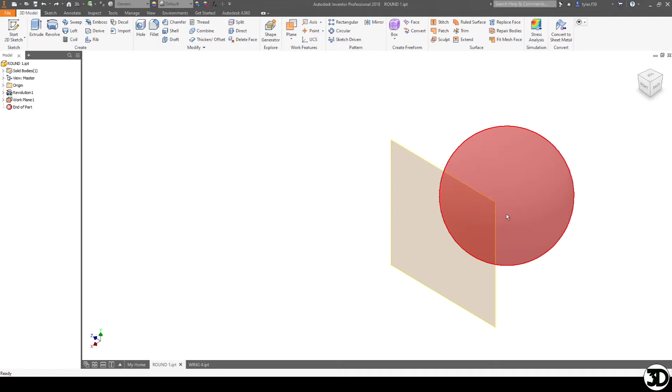In this video, we're going to talk about a couple different ways to add details to curved surfaces. These are going to be more on the beginner side just to help you out, and hopefully it'll assist you in your future designs. So let's get started with the first way to tackle this.

I'm just going to make a simple circle off of this work plane. We're going to make it 1.5 inches in diameter, and then we're going to make a square that's 1/2 by 1/2.

Now that we have our details, we can go to the Emboss, click the feature we want, and we can add it as an emboss or an engrave. So let's do an emboss first. You can see that it adds the detail no problem, and it matches that curved surface quite nicely.

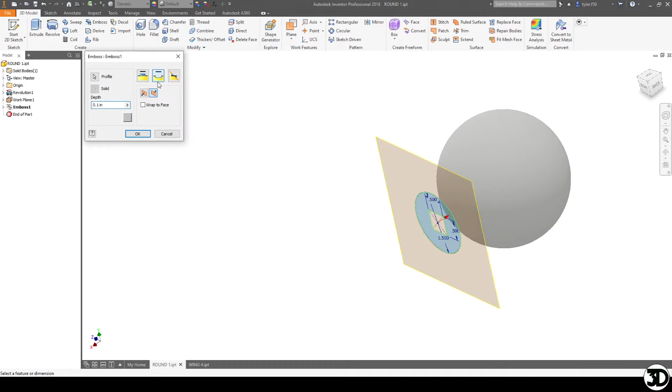However, we can also go and edit this and make it cut into the material as well to do the same idea. So you can do any kind of shapes you want and cut into this. So this is one style that you can utilize.

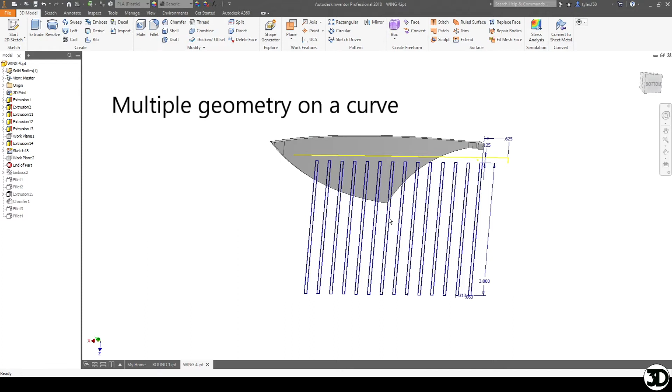Another version that you can do is, this is just a wing that I'm making for a part that I'm doing, and it has multiple cuts that are in it. So we're going to use the emboss feature the same way, and we're going to do a cut in.

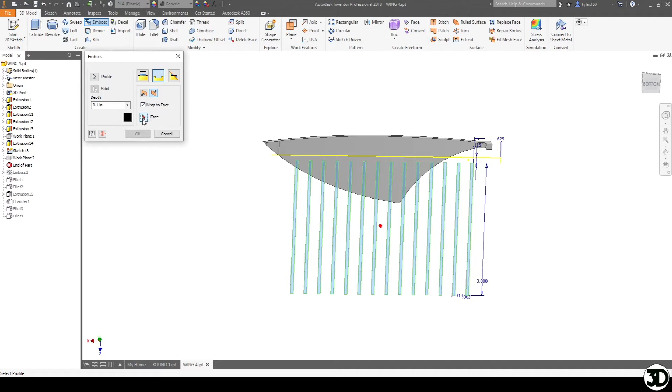We're going to choose all these features. Once they're all selected, we can go wrap to face, and now you're going to choose this face. As you can see, because of how many details we're doing, it now knows which face to wrap around, and when you're done, you have this nice pattern done for you.

So that's just another way of utilizing the emboss feature when it comes to putting details into curved surfaces. So let's go to the next version.

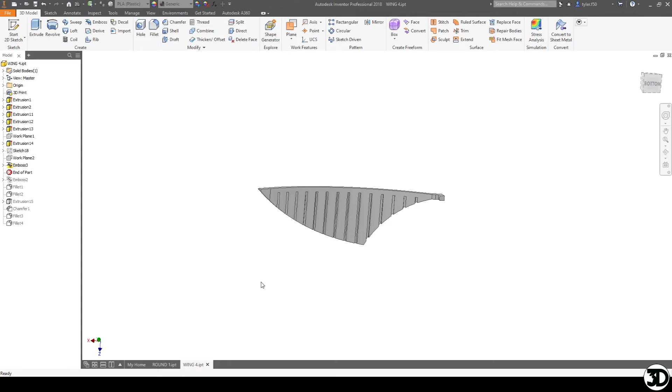Now that we're back to the sphere, we're going to do this a little differently now. This is going to allow you to add to a feature if your software does not have the emboss function. So firstly, we're going to do a sketch from the center plane of the sphere.

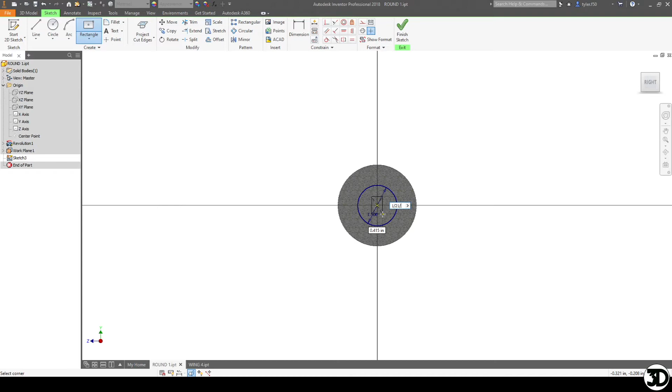It could have been done from the work plane as well. We're going to add a little bit more complex detail this time, and we're going to add just another detail on each side that's going to be 1 inch by 1/8. Then dimension that to be 1 inch. Why not?

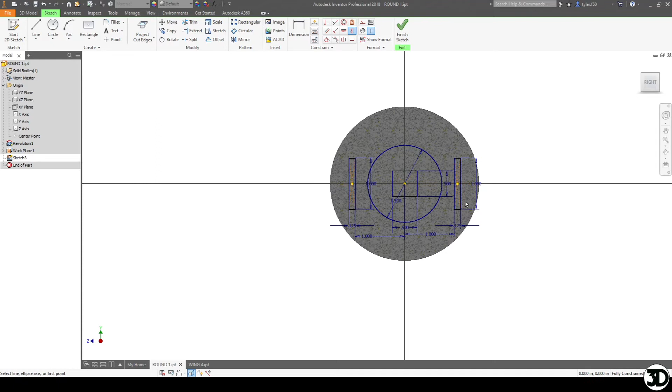So what we're going to show you here is we're going to extrude this out, which should be a feature you have for your software. We're going to extrude this detail 2 inches out. So now you can see that it's sticking out of the sphere.

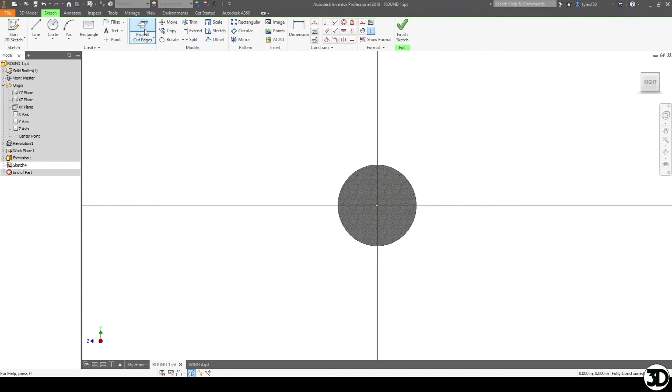Now what we're going to do is actually make another sketch about this axis. I usually do it the opposite or 90 degrees just to make it easier to see the feature that you want to do. So now we're going to make the cutting portion.

To start off with, we're going to make a circle and cut it in half, and then we're going to dimension it to be about, let's say, 1/16 for this case. So now it's going to be 1/16 of an inch that we're going to cut away from.

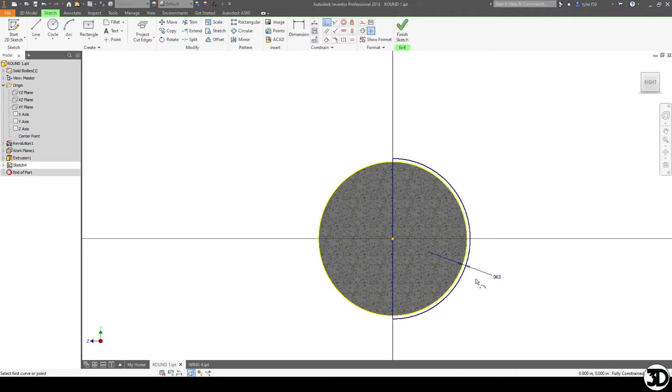Now what we're going to do is just make a quick little box that sticks out, and this is what we're going to revolve to cut around. So now that we're done this portion, you have a sketch.

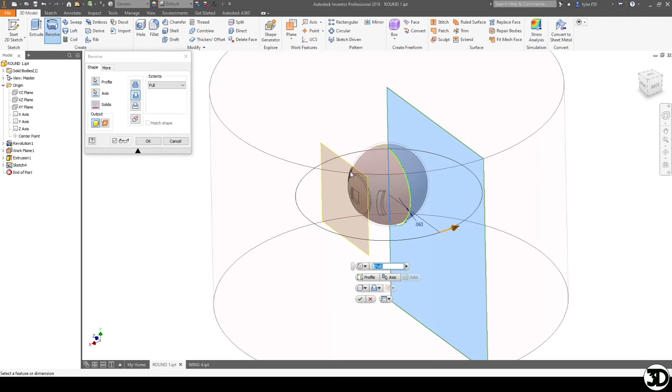We're going to do a revolve feature. We're going to choose the feature we want, and the axis being here, and then we're going to choose the cutaway feature, and now you can see it's going to cut away by 1/16.

And then if I wanted to go back to the sketch and change that to 1/8, change this dimension here, and now it sticks out further. So this is the same idea as using an emboss feature, but you're doing it with the functionality of your software.

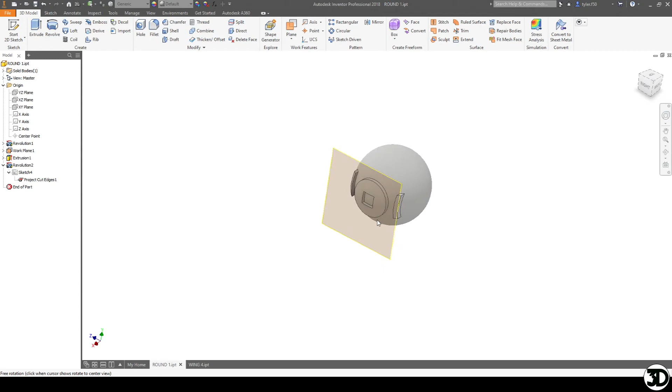Lastly, we're going to show you how to do the same idea, but with cutting into the material. There's going to be 2 different styles that we're going to utilize with this, but we're going to use the same sketch. So we're going to make a simple design again.

So we're going to make a circle that's 1.5 inches. And let's do something a little different this time. We'll do a hexagon.

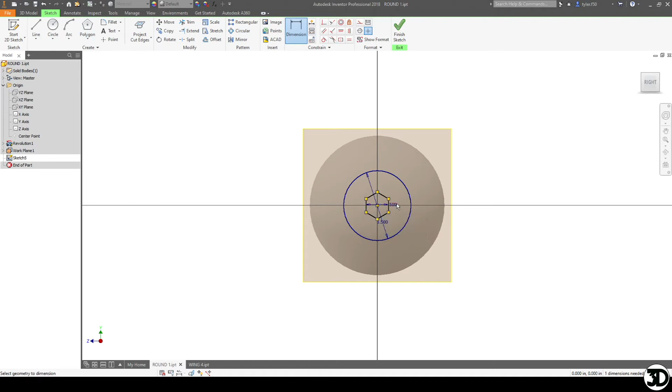We're now going to extrude cut this through all. So it's going to cut through. And now we have this empty void.

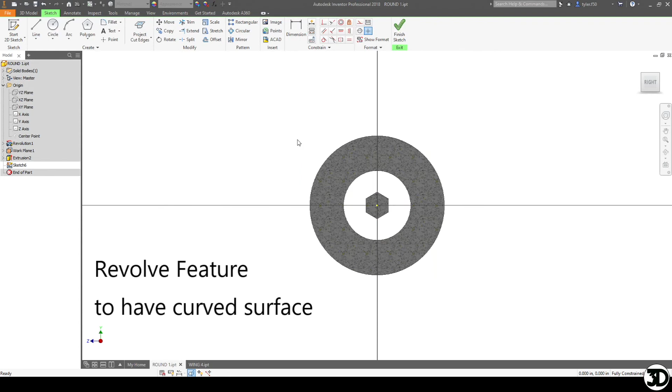So one way to fix this is we're going to make a sketch, again, about the opposite axis. We're going to project the geometry. And let's say we want it to be, again, 1/16 of an inch in diameter, or from the face.

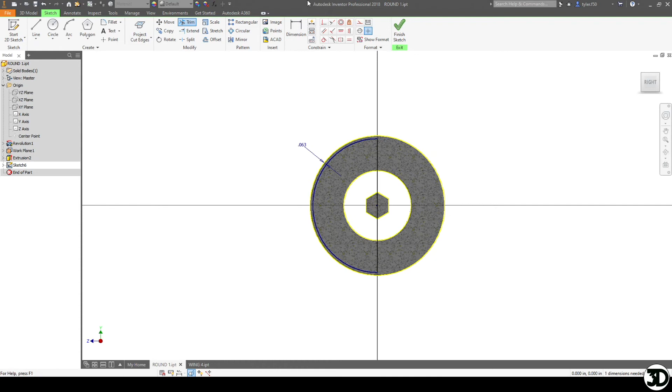And now what we're going to do, same thing, we're going to trim it. And now we can revolve this piece to create material.

So when you're finished, it has a nice arc that matches the component you're doing. So that's one way of doing this.

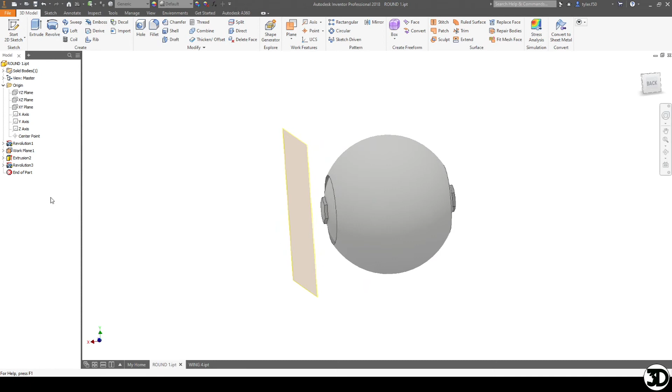Another way is if we go back and make a new sketch about this plane, we can actually project the geometry, and let's say we want it to stick out, be flat to a certain point, so it sticks out a little bit.

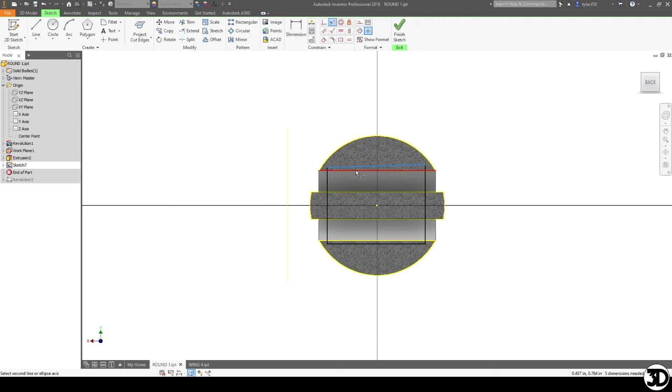I'm just going to do a couple simple constraints to make this work, and we're going to dimension this to be away from the surface by 1/8 of an inch. Make it equal to the same side.

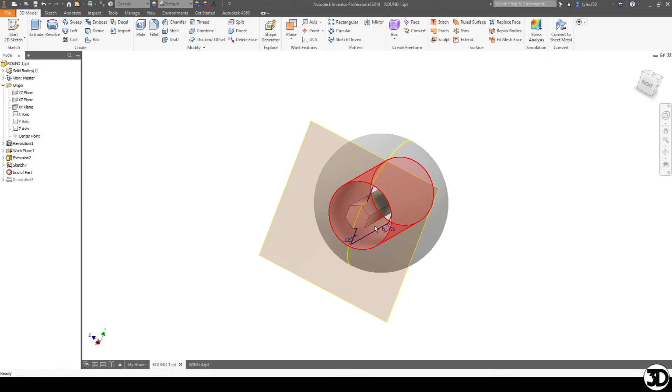Now, when we do this, we're going to do an extrusion, or you can do a revolution. Either way works. I personally would prefer to do a revolution.

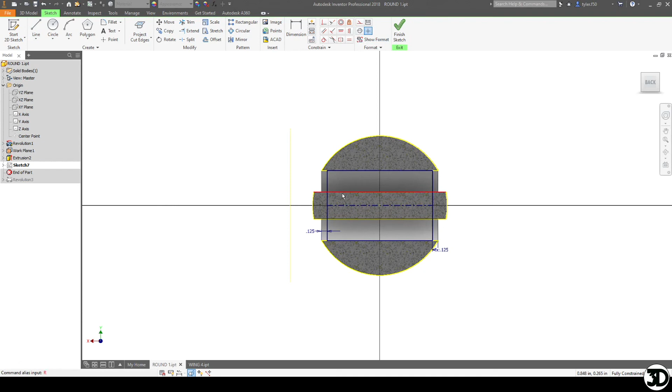So if we go back to the sketch, for simplification reasons anyways, we're just going to do an axis point from here, and we're going to revolve this, exit, revolve half of it about your axis, and now you have a flat surface as opposed to a round surface. And if for some reason you don't like how much that sticks out, then of course you can always go back into this and you can even cut away from it.

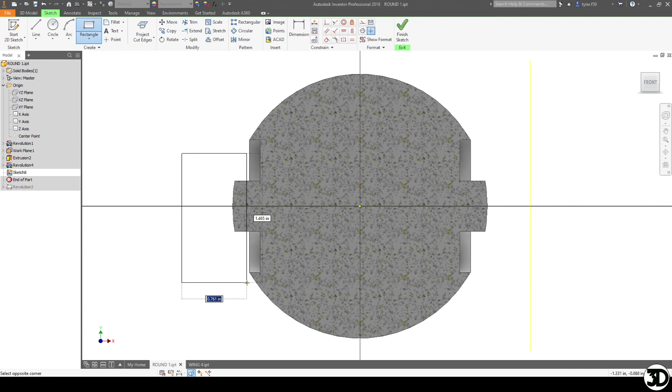So let's say you wanted it to be flat as well, a certain distance. Again, let's go with 1/8 of an inch. And 1/8 of an inch.

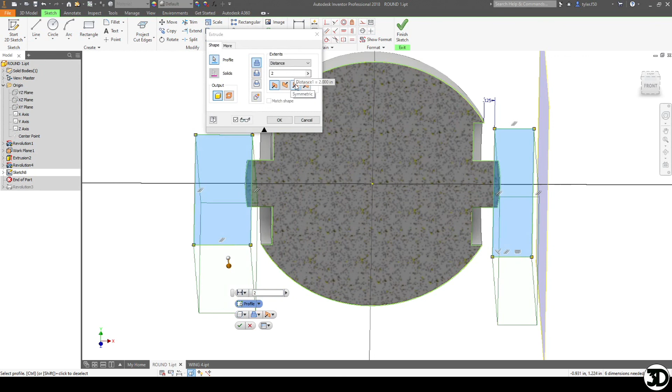You can now extrude cut this portion. Extrude. And now you can have it where it's flat as well.

So that's just a couple ways of utilizing features that you can add to round surfaces. If you have any questions, please feel free to leave them in the comments.